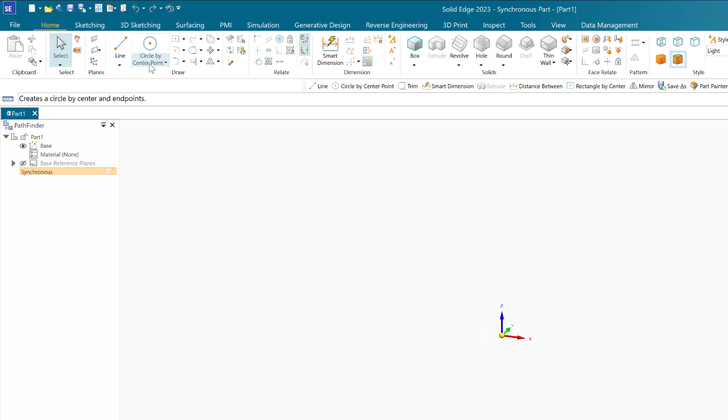There are 2 ways to start: either by having the base reference planes, or just click on one of the 2. If you click on the base reference planes, it will show all 3 reference planes, and you can lock yourself to one of them. What I prefer is to go around it by using one of the drawing tools. So I hide it again.

I want to use circle by center. Click on circle by center. Once you choose one of the drawing tools, the reference planes will show up on the drawing sheet.

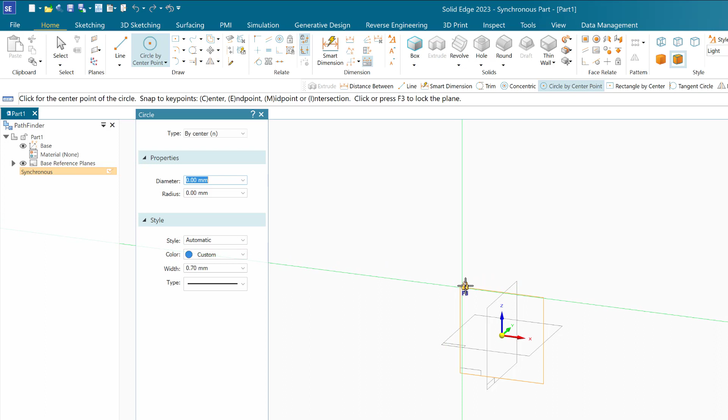Now I didn't put anything here, so I wouldn't put dimensions first. I'll wait till I lock myself to the front plane. So I'm going to move my mouse till I touch one of the lines on the front plane, and then click F3, the lock. This way you see I was locked — you see F3 in the upper right corner, meaning I was locked. Now I'm going to go to the cube and click on the front, and now I'm in the front plane.

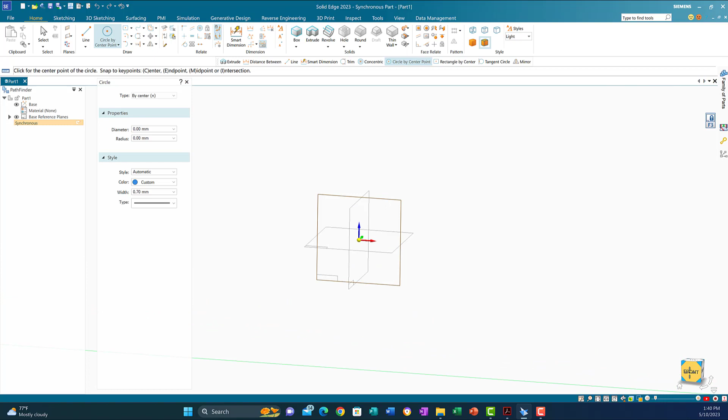So now I'm going to start with the first 2 cylinders — 2 circles. Circle by center, the first value is 70, and I'm going to put it exactly in the center here. The other one is 50, so I'm going to put 50 and put it exactly the same on the center here.

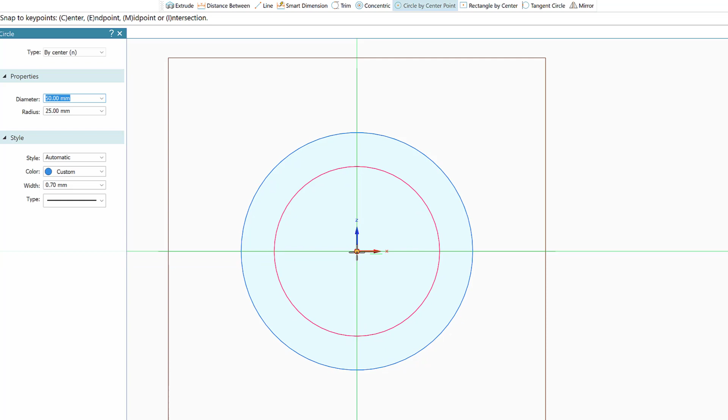Just to maintain the relation, I'm going to say concentric, click this circle, and this circle should be concentric — as you can see, the concentric relationship here. To see that, you have to have the relationship handles on; if you turn it off, it wouldn't show, but I like to keep it on. Why? Because during my drawing, while I'm doing things, I can check if things are done correctly, so this way I pay attention to the details.

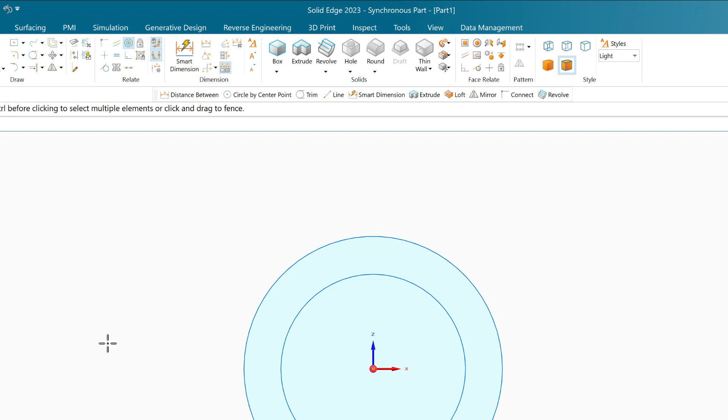Okay, so this is a good practice to do. But again, if you don't like it, it's up to your preference.

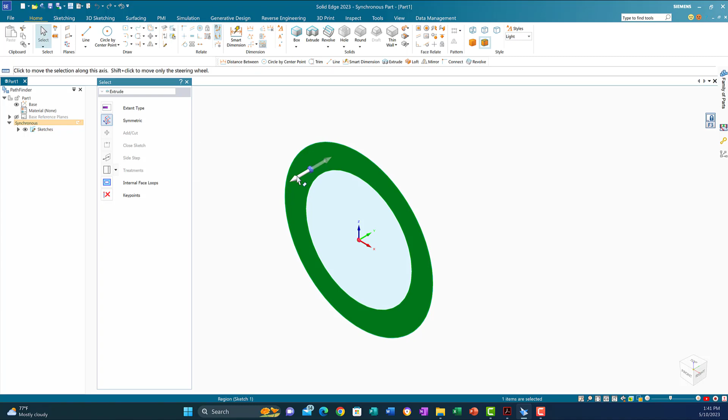Let's go to home and use select, click inside between the two circles, and choose symmetry. I'm going to choose symmetric, and plus, click on one of the arrows, either this way or the other way, it doesn't matter. Click on this one, and have this dimension be 40. I'm going to type 40.

So we succeeded in doing the central cylinder. Now I'm going to go back again and say, okay, I need to do the upper part here. So I will ignore the slot here and draw this part.

To draw this part, I'm going to go to the sketch and put it exactly on the right side plane. I'm going to lock myself to the right side plane, draw the sketch, and do the extrusion, symmetric extrusion. Let's go to Solid Edge.

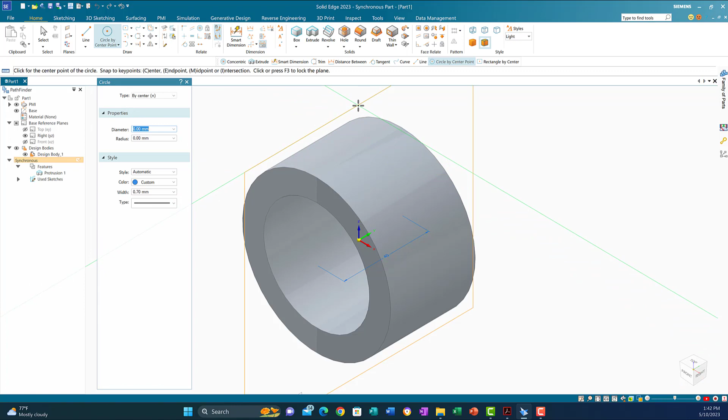I need to highlight, I'm going to click, open this one, highlight the right plane. Now the right plane is highlighted. So I'm going to click, okay, circle by center. Don't put anything, and I'll move my mouse to one of the lines of the right side plane. Click on it. Now I'm locked to the right side plane.

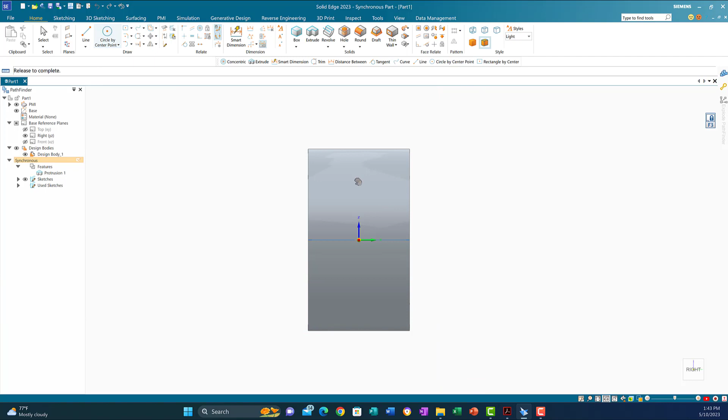Now the next step is I will go to this right side plane. Click here on the cube. So now I'm on the right side plane. Let me move it down a little bit. Okay, and then have a circle by center.

For the first cylinder, the first circle, let me go to the drawing. The first circle is 28, and the second one is 14 - 28 and 14. And the distance from the center to the center of the two bigger circles is 52. So let's do that, and then we will continue.

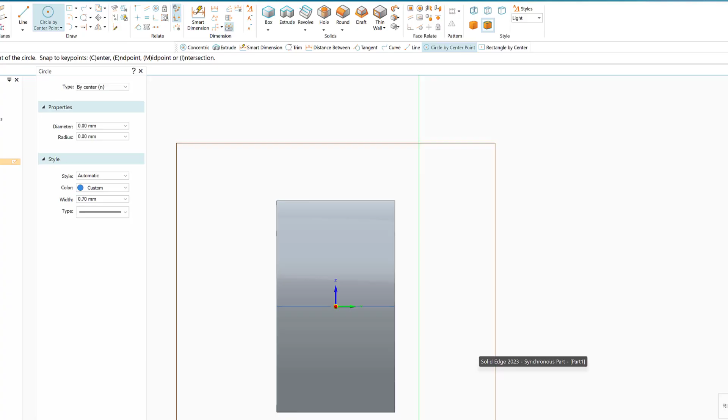Go from the center, it should be aligned with the center. I notice it's aligned when I see the dashed red line. So I'm going to click when I see the dashed red line. Okay, the next circle is this 28 - so we're done with that. The other one is 14. Enter.

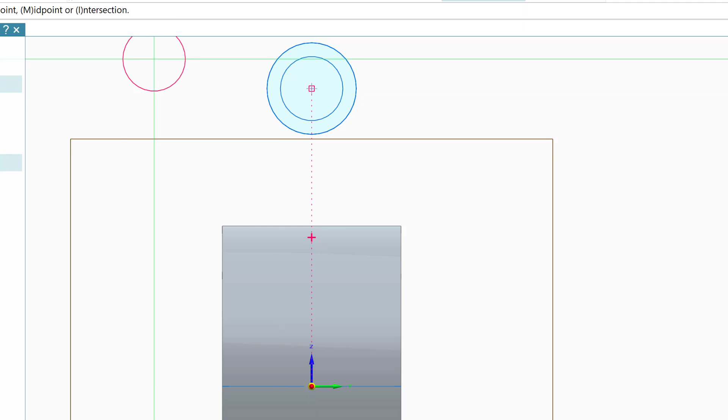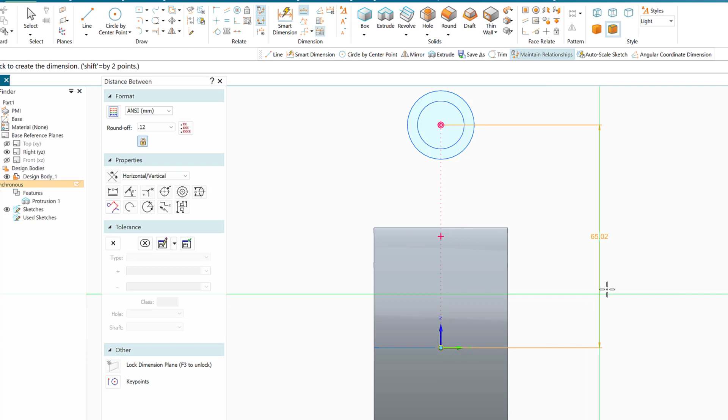Highlight the circle to go to the center. When it says concentric, I'm going to click. Let's make sure that it is concentric. So now I can see this side. Now, the distance from the center - when I see distance between XY horizontal vertical from the center of these circles to the center here, to the center of this one, which is the y-axis, the vertical distance here will be 52. Enter. So everything moving together means everything is done right.

Okay, now the next step is I'm going to get the line, get it tangent to this circle. You're going to go down.

So now let's go back here. I'm going to select about 22 vertical. That's good enough, so I'm going to say 22. I'm going to click. I don't have to make it exact.

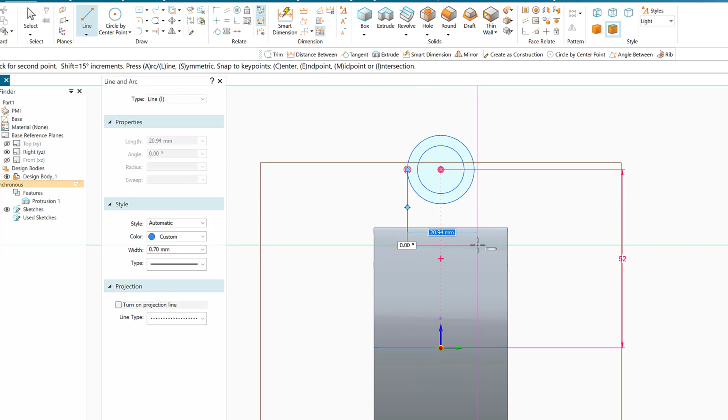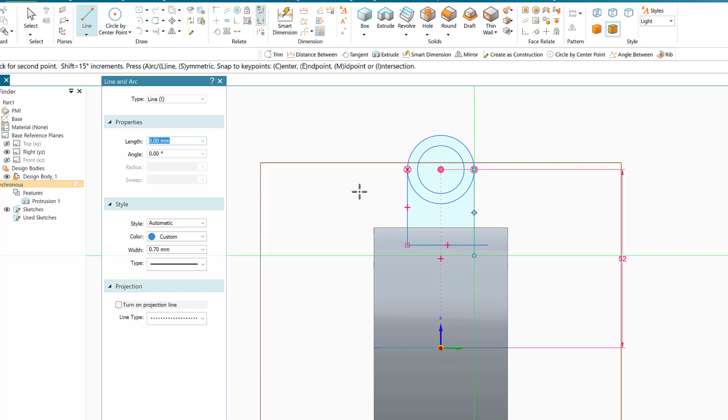Then what I'm going to do is go horizontal, just leave it somewhere here, right click to get out. I'm going to draw a line again, tangent here. It's going to move with me, go vertical. When I see vertical, I'm going to click.

Good, right click to get out, trim. I can get rid of these two extra lines. Okay, everything looks fine, everything looks good - the tangent circle with an X, circle with an X, and everything is connected.

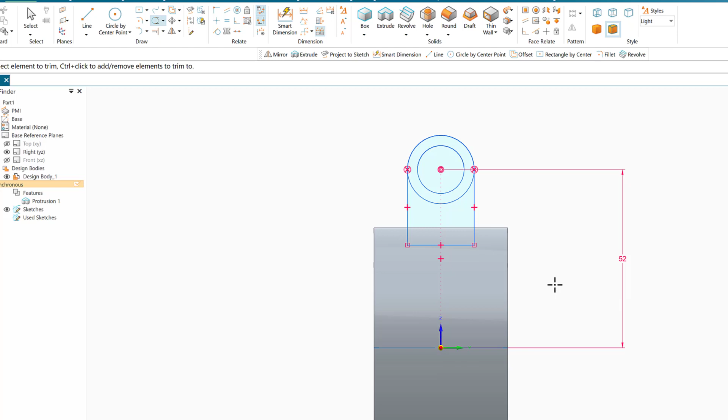So the next step is I'm going to do the extrusion, symmetric extrusion. I'm going to tilt it a little bit, go home, and zoom in so I can see it better. Okay, here it is, so I'm going to select.

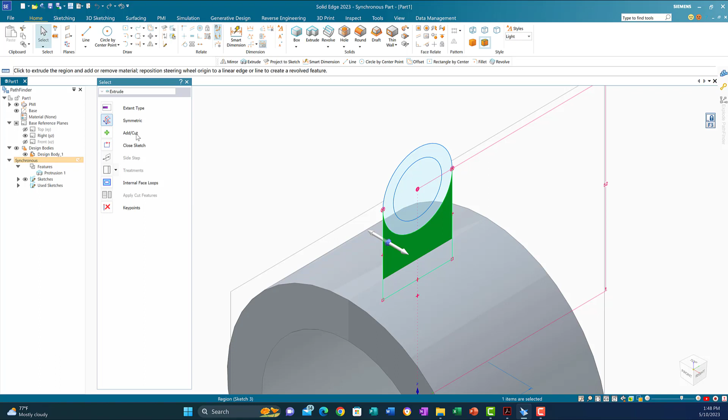I'm going to select the area inside here, this one here. It should be symmetric, and instead of cut, it should be plus - I need to add symmetric, fine. Any arrow will work. And we're going to say that the dimension here is 30, so I'm going to put 30.

Enter. Did I put 30? Yes. Okay, and the next one is, again, select is on.

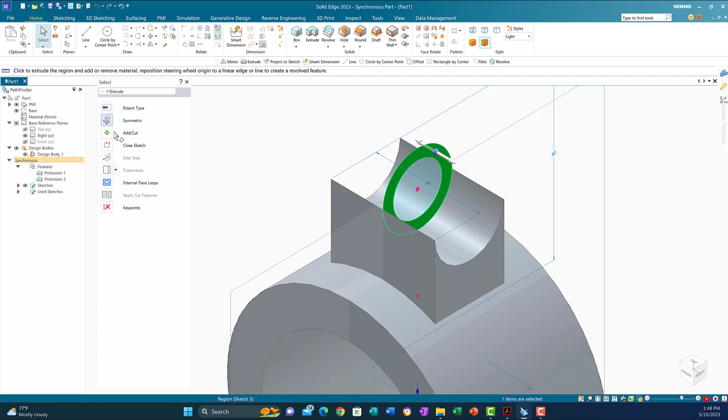Click on inside the two circles, so choose symmetry plus. Okay, so everything looks fine. I'm going to click on the arrow and then move this one to be 38. Enter.

So I succeeded to do the two parts, that symmetric part, the one symmetric about the front plane and the one symmetric about the right side plane. Okay, the next step will be is what?

To do the slot, this slot here. And to do this slot here, so I'm going to say okay, it will show, I'm going to draw a rectangle by center. The width is 6, and the length, the height will be what?

I choose, okay, so I need to cover this area from here to here, okay? So at least I need to have this one is what? The diameter is 28, so I need 14. Oh, and then from here to the bottom one is going to be what?

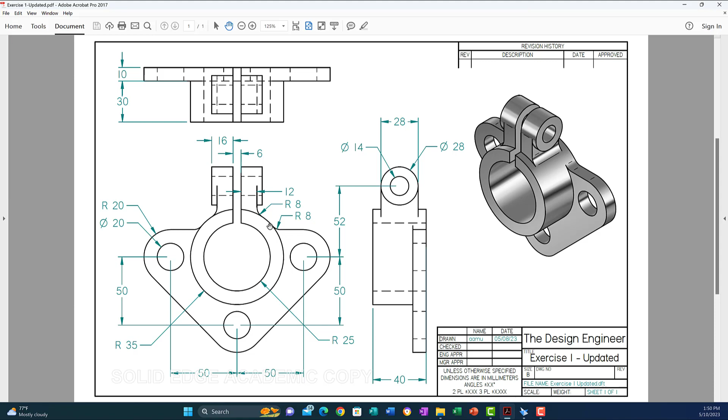52 minus 25, so it's going to be 27. So 27. So I can say, okay, maybe 30 I will cover, and I have extra. So I'm going to say 30 down, so I need to go 30 up, so I can put it exactly in the middle, and then 6 at the thickness. So I'm going to go with thickness 6 and height 60.

Okay, first I need to lock myself to, I'm going to choose the drawing tool, a rectangle by center. And I need to lock myself to what? To this surface here. Okay, so I'm going to click on the lock. Click on the lock. So I'm locked to this surface.

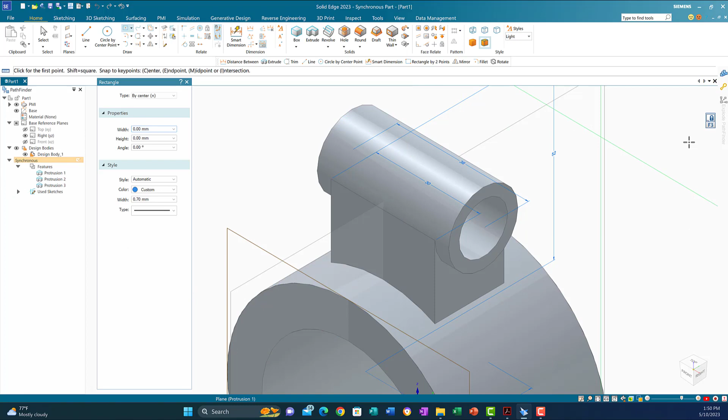Let me go to the front plane and move it down a little bit, or just zoom to this area. That's good enough.

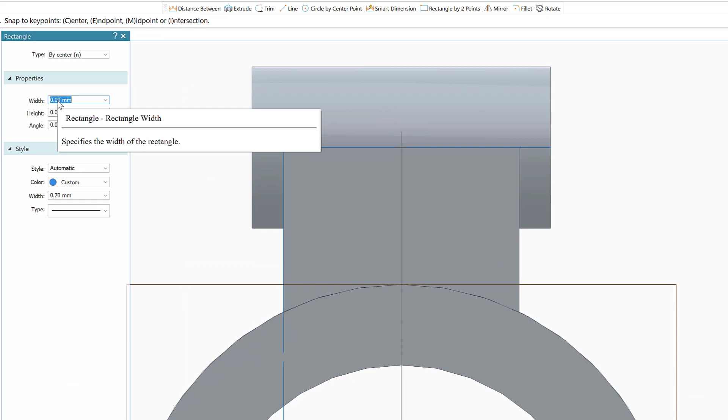Okay, and now this is rectangle by center, and I'm gonna say what? The width is 6, I'm gonna put 6, and the other one is what? 60. Enter. So I have it.

I need to put it exactly in the middle of the center, the circle here. So I'm gonna just in the middle here. I'm gonna click, so this way I cover the whole area I need to do the slot.

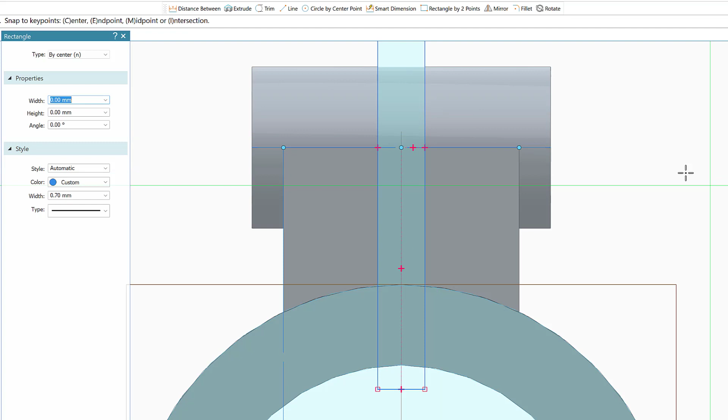Okay, so now I'm gonna rotate it, or go home and choose what? I'm gonna choose extrude. Okay, and then extrude, instead of face I'm gonna choose what? Chain. So I'm gonna choose chain, and instead of plus is gonna be cut, minus, and not symmetry, so just in one direction. So I'm gonna get rid of this one.

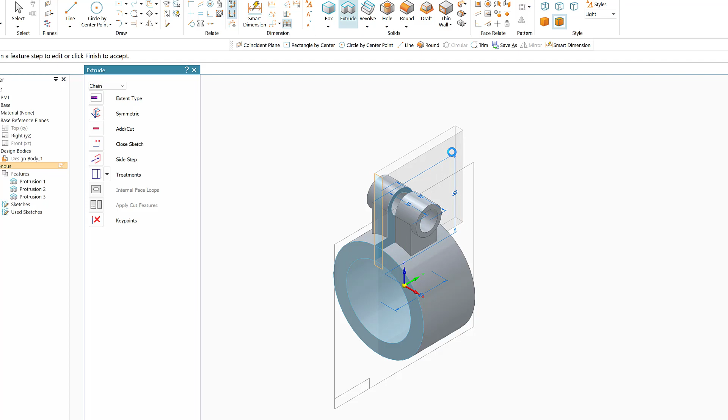So I'm gonna touch any line in the rectangle by center. This will highlight the whole shape, and then the whole chain, and then I'm gonna click on the arrow that will do the cut inside. So I'm gonna go inside till I cut the whole thing. So I was able to do the cut inside.

And this is very nice, okay, so we did the cut. The next step is what? I need to lock myself to the back and then do the other sketch. So I'm gonna lock myself to the back and do the sketch here, this for this wing or whatever.

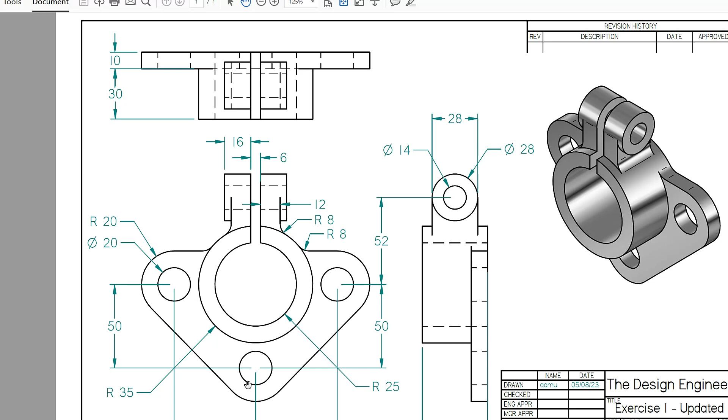So I have a circle 20 and a bigger circle 40, 20, 40, 20, 40. So what I'm gonna do is just to draw half of the side of the shape and do a mirror of it. Okay, so let's see, and the distance from the center to the center 50, and the center to the center 50. Okay, so I have a 50 and 50, 50 and 50.

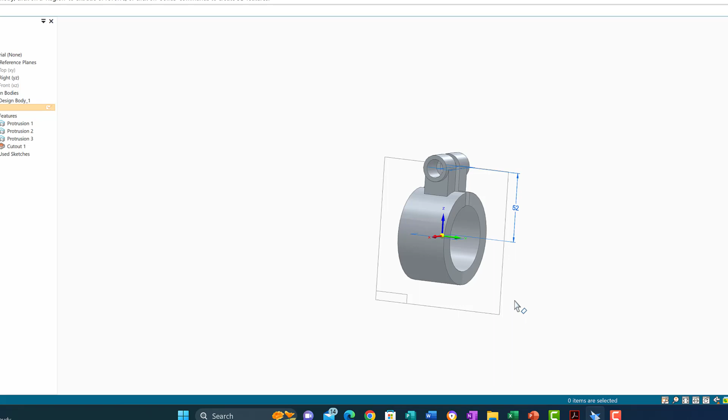Okay, so let's go again, go back to solid. Okay, this is the back of the drawing. So I want to zoom to lock myself to the back.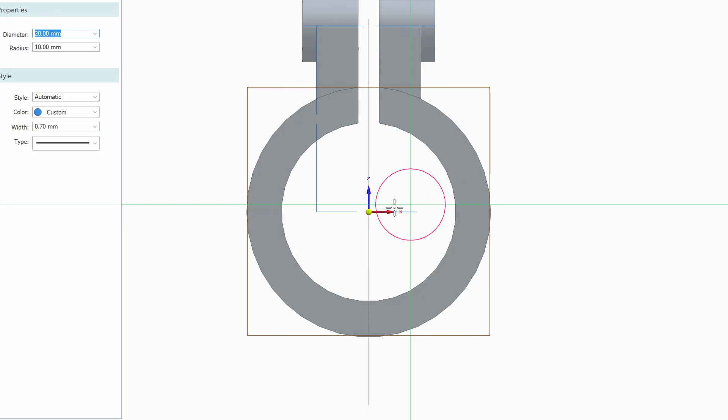Okay, now let me get a circle by center, and the first one is 20. Enter. It has to be on the same line here. So go horizontal. When I see dashed red line, I'm gonna click and do the same from the center here, dashed red line.

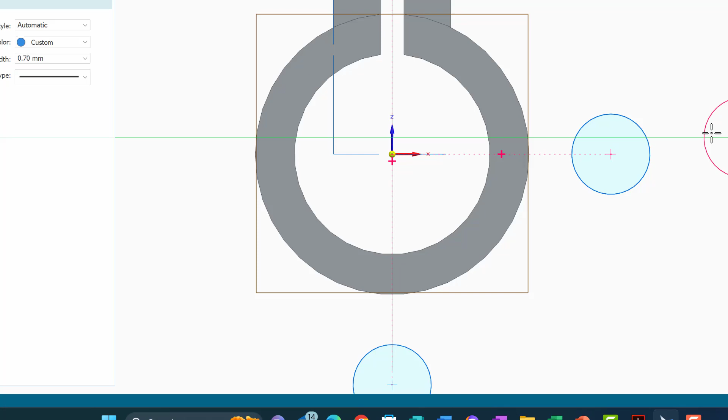I'm going to click. Let me make sure that it is in the back. Yeah, it is in the back. Okay, now let me go down. Okay, go to front again.

So I need to get the bigger circle, which is 40. Highlight the circle and put it exactly in the middle here, and highlight the circle also here and put it exactly in this concentric. Okay, let me check the symbol concentric.

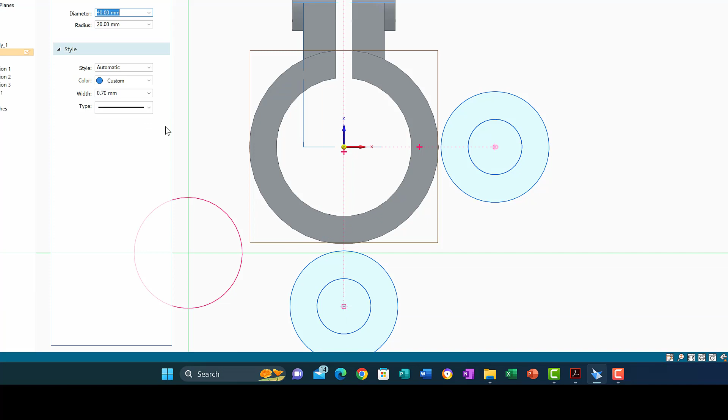Okay, now let me correct the location. So now let me first get the dimension. So this should be 40, and this should be 20. This 40. Okay, 40 and the 20.

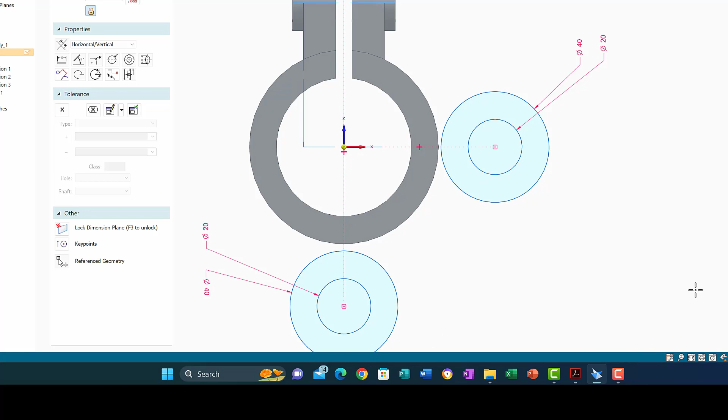So now I need to correct the location. So what I'm going to do is I'm going to move everything up a little bit.

I need to get a line, tangent to both bigger circles. So a line, I'm going to start from any point here. It's going to move with me and come to the other circle. When I see the two symbols, I'm going to click, right click to get out and escape, and then I see that circle and X in it. Okay, so I succeeded to do that.

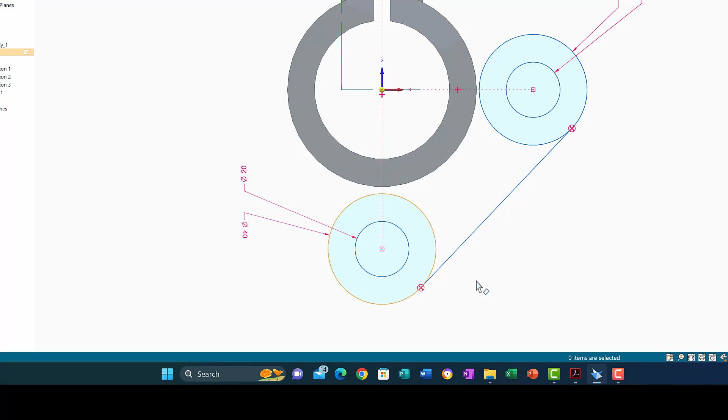Oh, before I forget, let's get the dimension location correct. So the X dimension between the circles, from this circle to this circle, the perpendicular distance is 50.

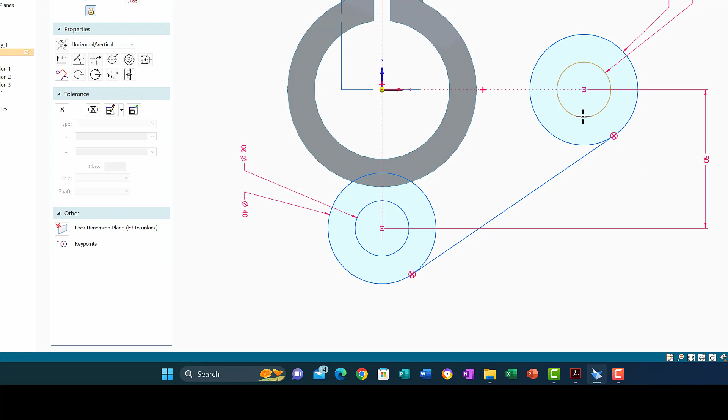Okay, that's fine. And then what? The X distance again from this circle to this circle, the horizontal distance should be what? It is 50, another 50. Very good, so we got everything now corrected.

So now let me draw the horizontal line on the top here. I'm going to click on this one here. Yeah, I needed to have it horizontal till it touches here. So it is horizontal, I'm going to click on this one.

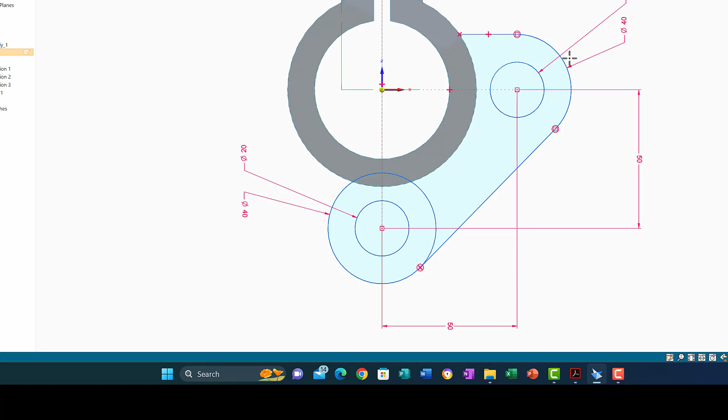Very good. Okay, now let me go to trim. I'm going to get rid of this part here. The next step is I need to do a mirror of the shape here so I can get the other side. So I'm going to click on mirror.

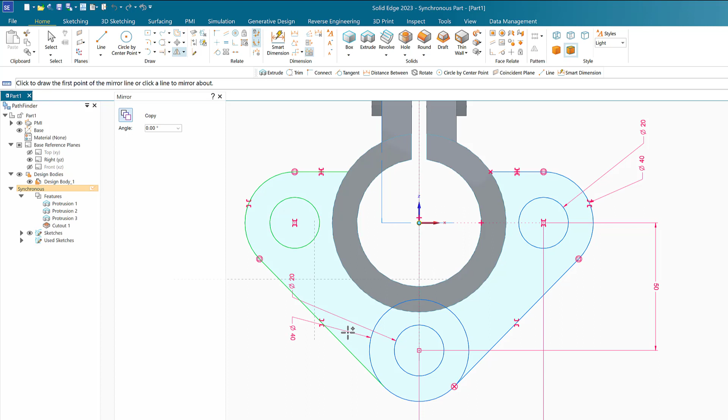On mirror, and then highlight this sketch here up to the end of the line, so this green thing here, and then click on the z-axis. So now I was able to get the shape exactly here. Okay, so everything looks fine.

Why I'm assuming that it looks fine and the connections are good is because I see that light blue color inside, meaning that I can say, okay, I need to trim this circle. I think that's it. Okay, so everything looks fine now.

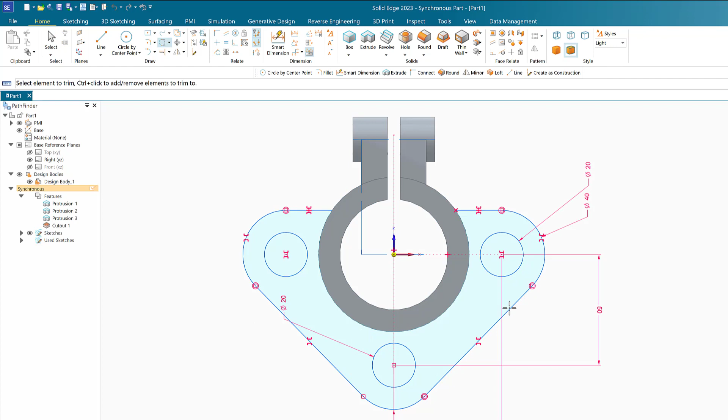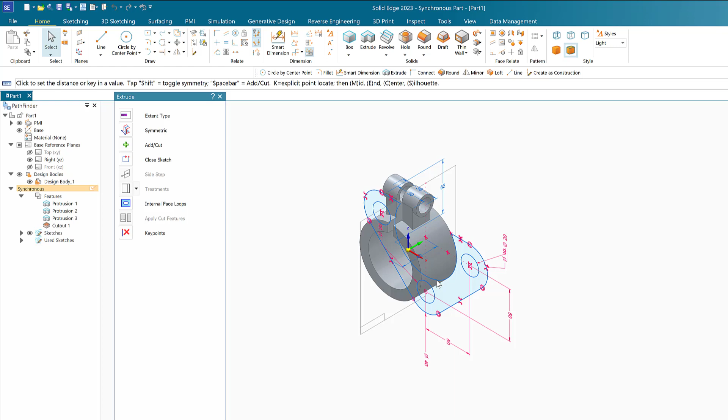So let me go home, click on select, click on this area here, and it's going to be plus, add, extent, not symmetric, it's going to be in one direction, so go outside. So I'm going to go outside, meaning I'm going to go only for 10. I put 10.

So I got the shape and I got everything. Everything looks very, very nice. The only thing left now is to make the curvature.

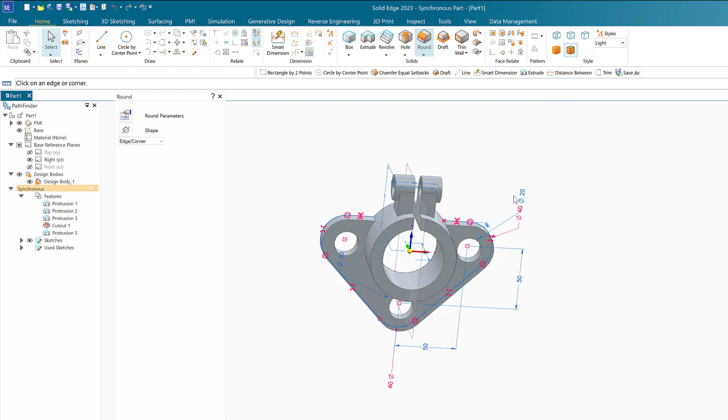So to do the curvature, I'm going to use what? The round command. I'm going to zoom to this location here. Okay, very good, okay, the round command. So I'm going to click on this. Okay, round, what is that?

Okay, here is the round command, and I'm going to click on this line here. I need it round, 8 millimeter, that's the correct number I need. So I'm going to say enter.

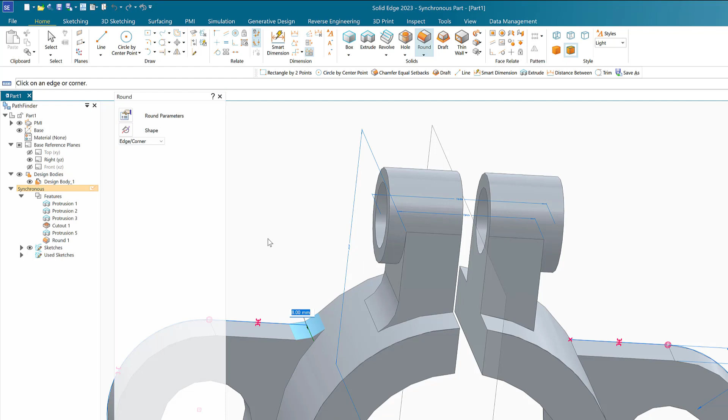The same thing I'm going to do the other one too. Okay, 8, enter. Okay, and let me rotate it a little bit with the mouse so I can get the other side. Oops, sorry.

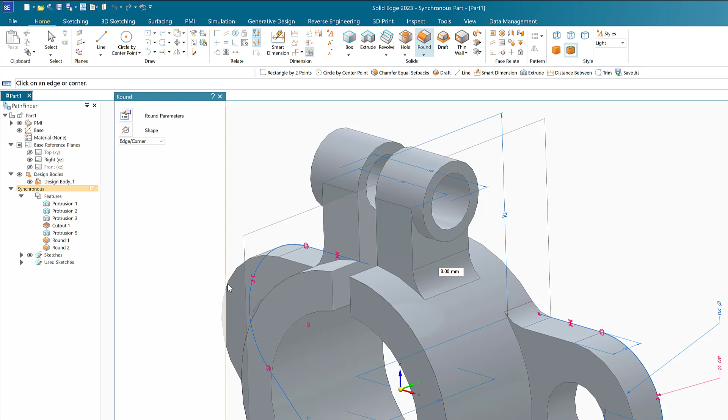Round this line here, click, and round this line here. Okay, so now I'm going to say enter. So, okay, so we succeeded to have the drawing done in a very efficient and quick way and without any problems.